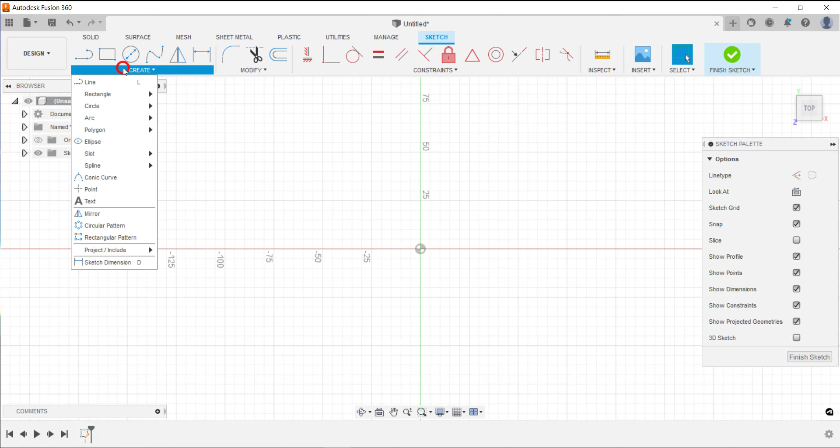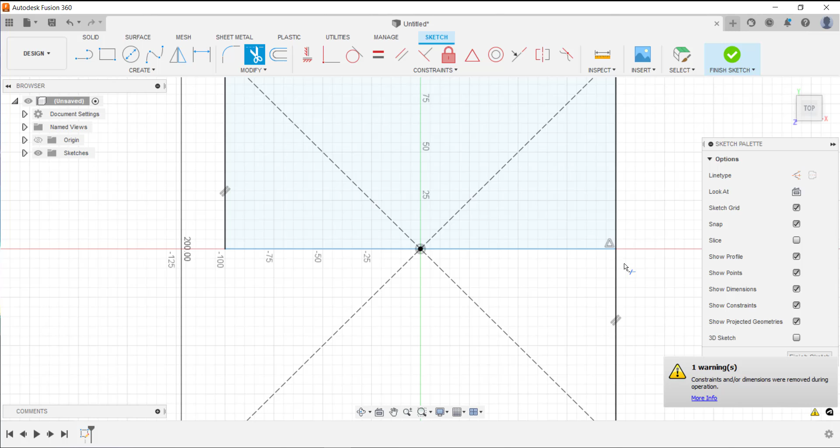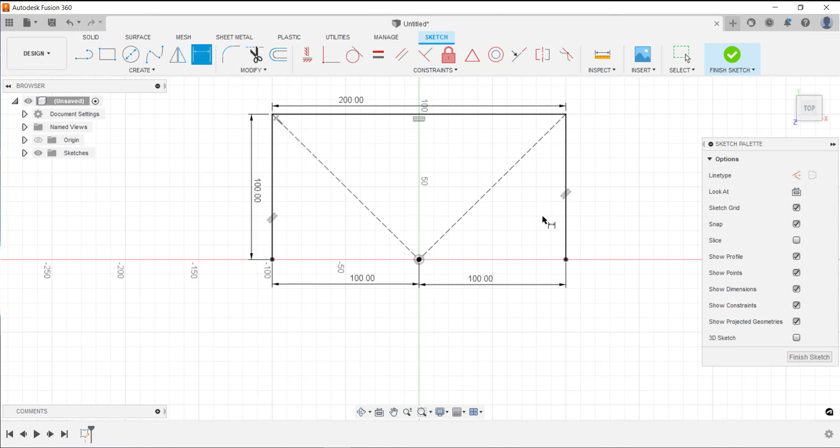So what I'm going to do first is I'm going to create a sketch on the XY plane, and I'm going to create a center rectangle which I'm going to make 200 by 200. And what I'm then going to do is I'm just going to draw a line in the center, and I'm just going to use the trim tool just to take away the excess that I don't need. So I'm going to take these other lines out like so. And I'll just do a dimension from the center. And we've got that sketch now fully constrained.

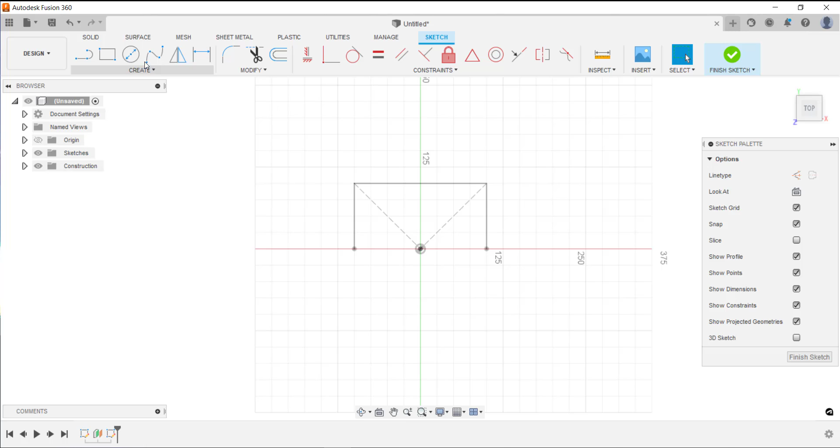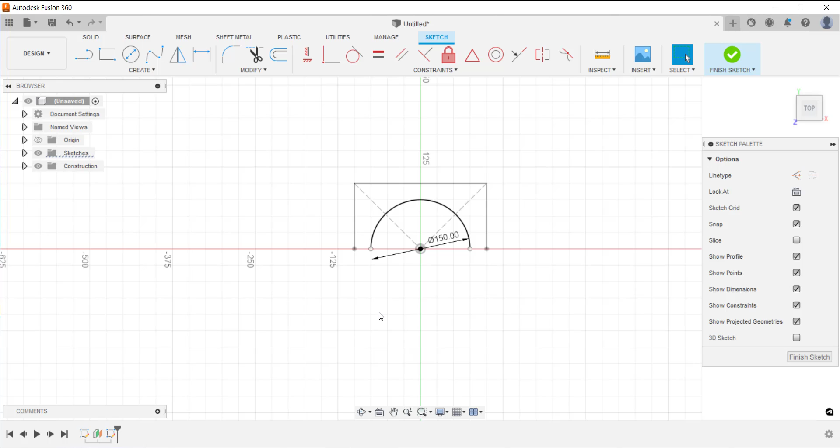So what we're now going to do is we're going to create an offset plane, and we're just going to go 250. And what we're going to do now is we're going to go and draw a sketch on that plane with this offset. And all we're going to do now is we're just going to draw a circle at 150. And again, we're just going to draw a line from the center across, and again we're just going to do a trim. Okay, so we can see that that's all constrained.

So what we're going to do now is we're going to go to the Flange tool, and we're going to choose the Lofted Flange option, and we're going to click the bottom profile and then the top profile. And again we can see here that we have a profile. And again, if it was going to be die formed, we could do that by choosing that as the forming type. But in this instance, we're going to go with brake form. And again, we have the tools for changing how the shape is constructed with the facet control.

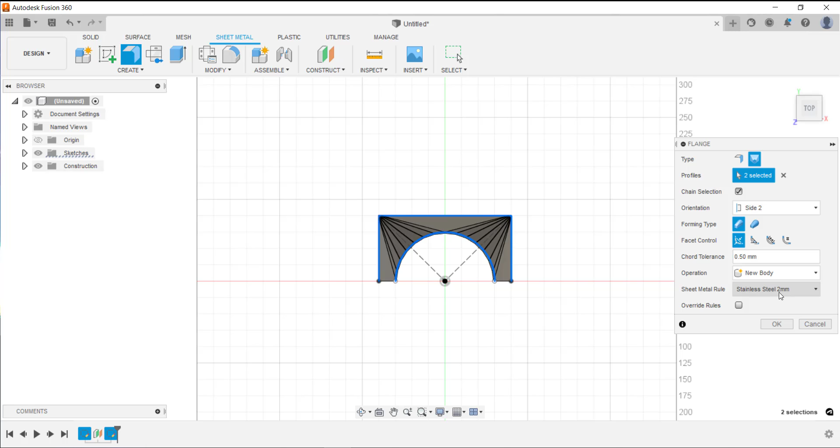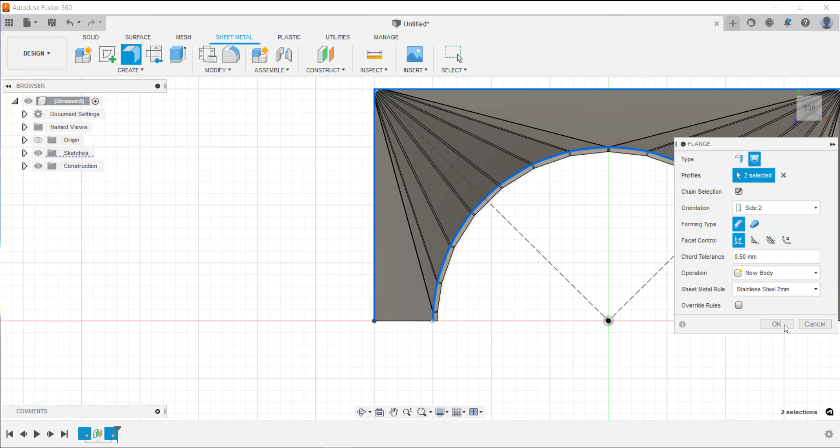Okay, again, we're just going to go with a 2mm stainless steel as our sheet metal rule. And what we're going to make sure of is that our orientation is correct, so we're working to within the confines of the sizes of the sketch that we created. So we're going to go for side 2 here, and that's going to fit inside. So if I click OK, that has now created us our open flange.

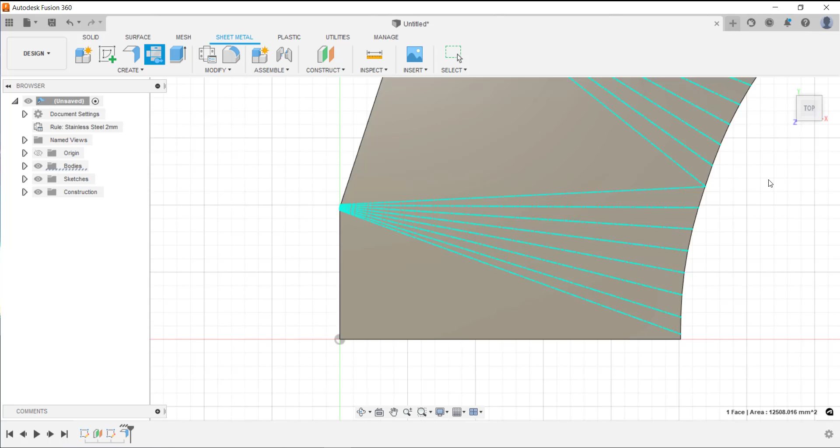However, where this differs is with the previous example we did with the closed contour, we had to put a split in. With this, because it's an open contour, when we come to unfold it with the create flat pattern, all we have to do is click on that side face I'm highlighting, and it will automatically create the pattern. And again, all we have to do then is hit the DXF export, and we can create our DXF of a flat pattern ready to be exported out to a laser, for example.